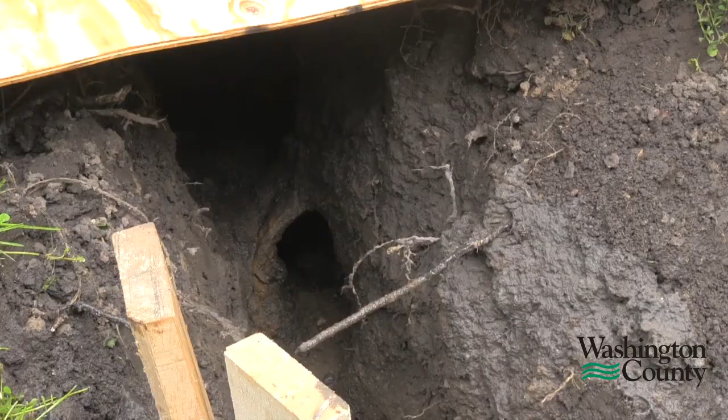This is what most people think of when they think of a failed septic system, where you have septic tank effluent coming to the surface like we have here. Although this is an issue that needs to be addressed, this is not the most common septic system failure.

Now, as nice as it is sitting here, let's get out of here.

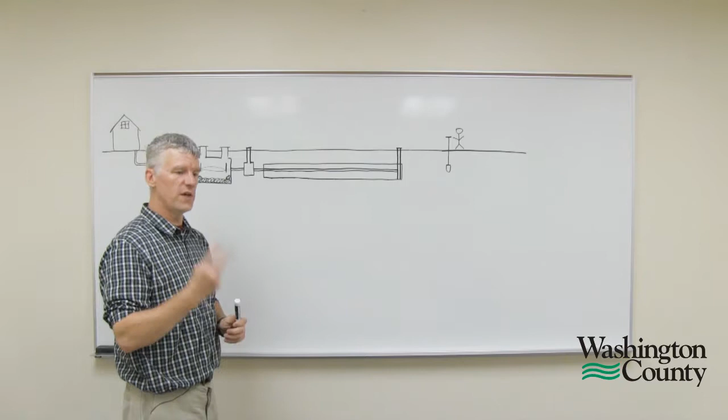That's better. So let's talk real quick about what an existing system compliance inspection consists of. There's two things that are mainly looked at for a compliance inspection. One is the integrity of the tank. On the sheet, it's called tank integrity. And what the inspector is looking for is whether or not the tank is watertight. And there's a number of different methods that can be used to assess whether or not the tank is watertight.

But one could imagine if there's a crack in the tank and the effluent that's in the septic tank is able to leach out, that is a system that is failing to protect groundwater. So that's one tank integrity issue. The other is just as common.

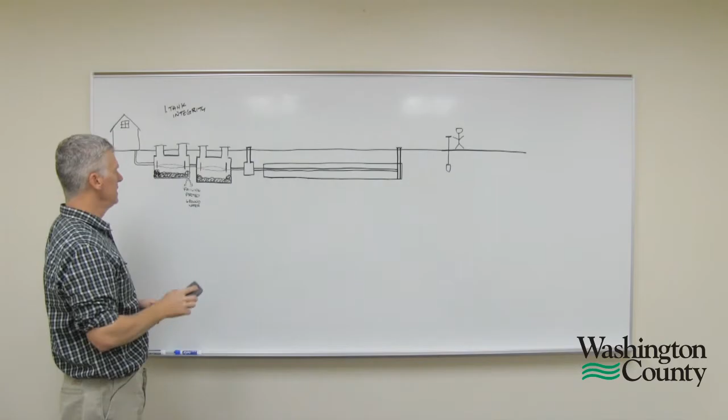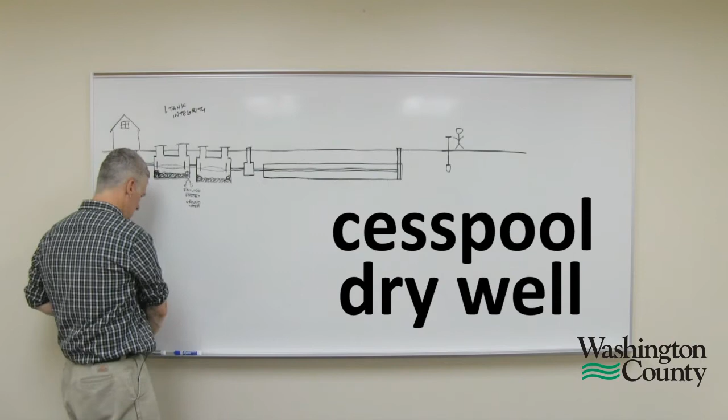Back in the 60s, or before septic regulations came in line, a lot of the tanks that were put in didn't have a bottom. And these are called cesspools or dry wells. And without a bottom, again, this effluent in the septic tank can just freely leach out and not get treated before it hits any kind of groundwater. So a cracked tank or a cesspool are both considered a tank integrity issue in a septic system that would require a replacement. So that's one item that's looked at.

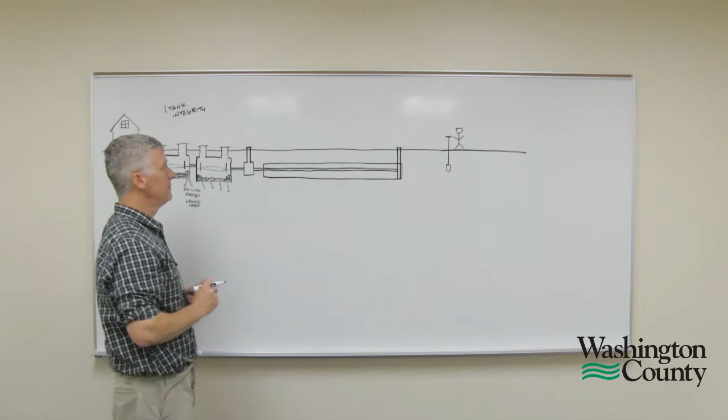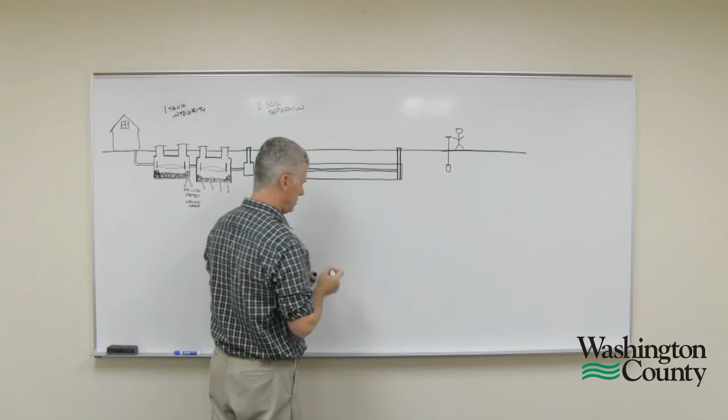The second item is what we call soil separation. What does that mean? That is simply a vertical distance between the system bottom and any type of restriction that is found during the compliance inspection. So let's imagine this system right here. Let's imagine that this distance is 24 inches. So the drain field trench was installed 24 inches into the soil. Now let's imagine that there's water at some point below the surface, which there usually is. So this is water table.

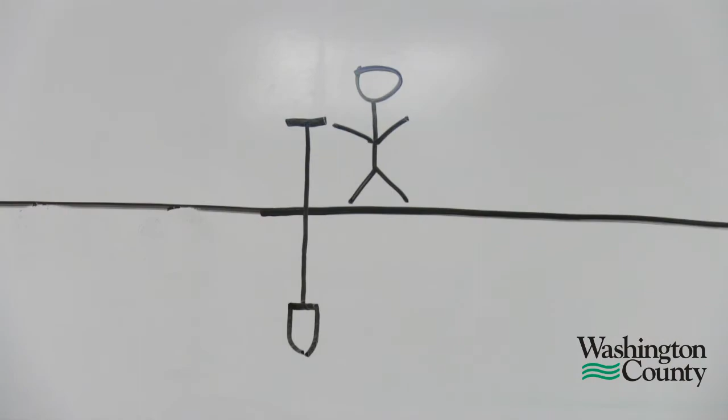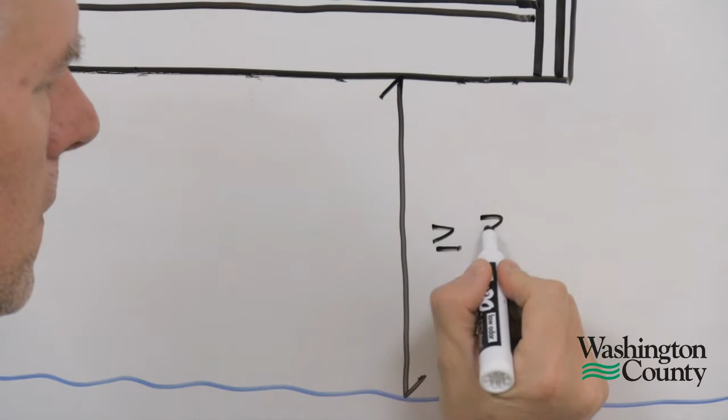Now, the first thing the inspector is going to do is determine what this depth is, either by tile probing or old permit records. He's going to determine the depth of that system, and then he or she is going to go some distance away from the drain field and take a soil boring to determine where the depth of that water table is. Now, this distance between the system bottom and the water table has to be greater than or equal to 36 inches. If that is the case, this drain field trench is deemed compliant.

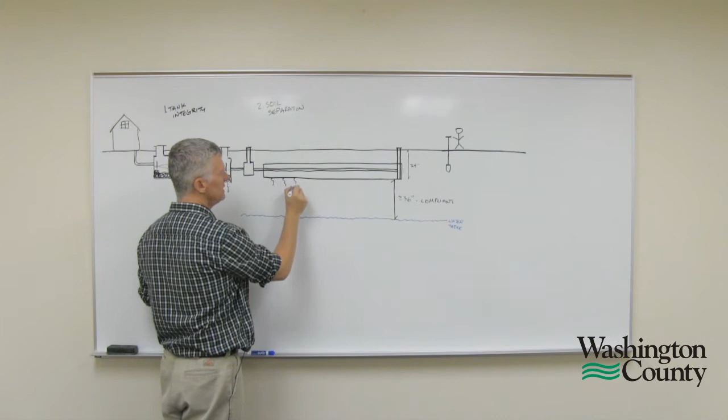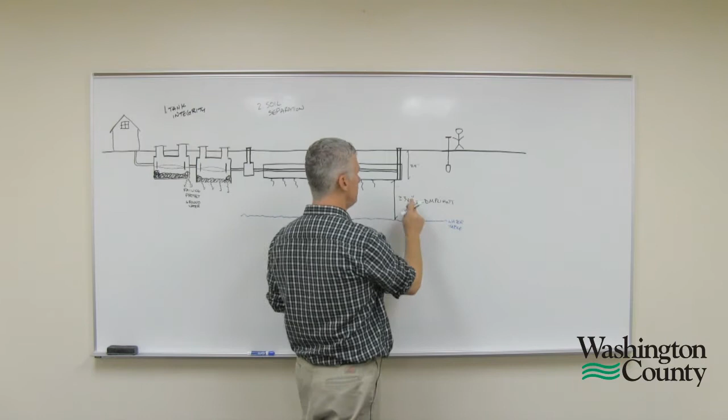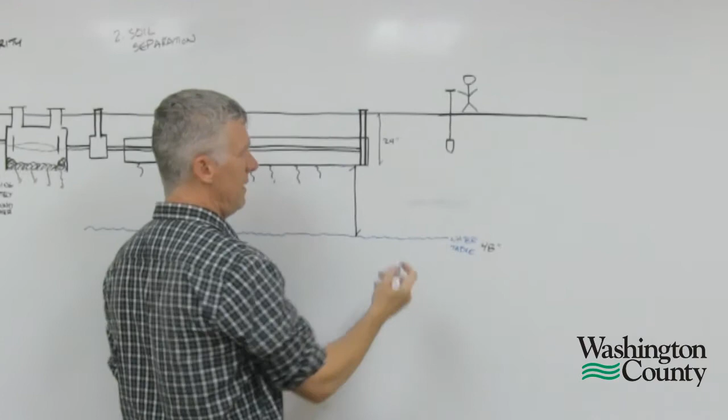Because in order for the sewage or the effluent that's leaving the septic tank to be treated in the trench, we need 36 inches of unsaturated soil for all the pathogens to be treated before it hits the groundwater. Now, if that compliance inspector determined that this depth, let's say, was 48 inches, now this distance is what? It's 24 inches. And that is a non-compliant system, because just like the leaky tank, it's failing to protect groundwater.

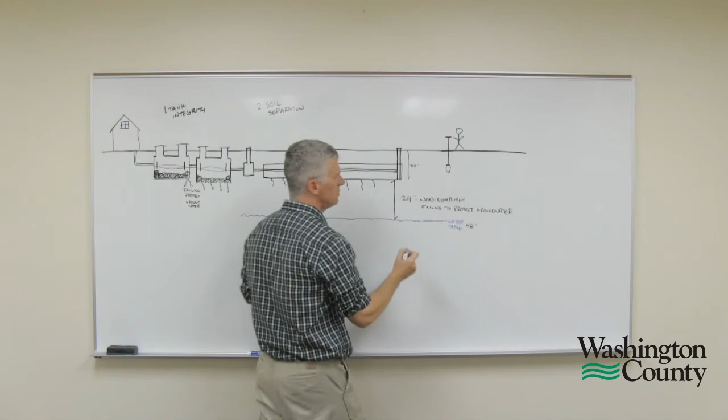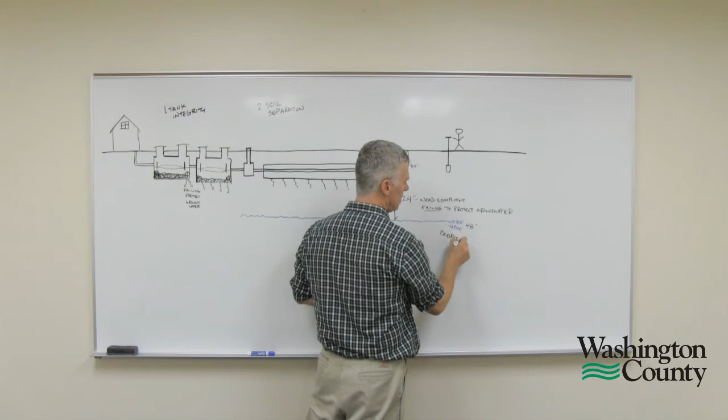A lot of times when people hear the word failing, they imagine what was in the video earlier with me standing in a puddle of septic tank effluent. That's usually not the case. That's an imminent threat to public health. Failing is failing to protect groundwater. Now, water table is one of the restrictions that we can find. Another one that's common in Washington County, especially in the south part of the county: there's a lot of bedrock very close to the surface, and that is also deemed a restriction. So we need to have that 36 inches of vertical separation between the system bottom and bedrock.

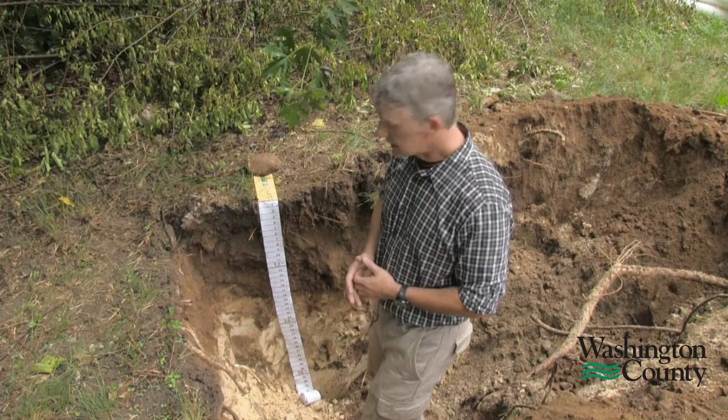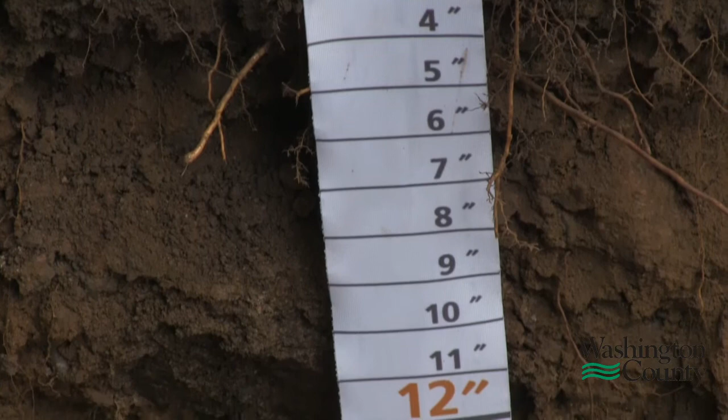Okay, here we have a real soil profile in Washington County, and we have this tape here to show you the depth of the soil and the restriction. And here we have a very obvious restriction of sandstone, which is bedrock, and we need to stay 36 inches away from that. So you can see with this tape here, if we were to put a system 12 inches into the ground, we would only have 6 inches of vertical separation between the system bottom and the restriction, and we wouldn't get adequate treatment before the sewage enters the bedrock.

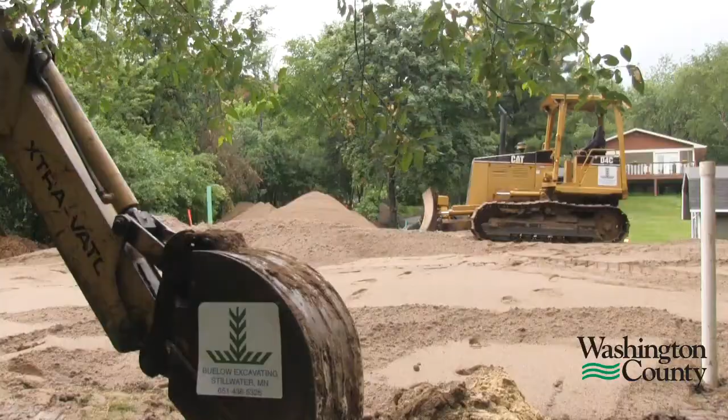So what we need to do in this situation is artificially provide the rest of the separation by putting sand on the ground. In this case, we're about 18 inches below grade to a restriction, so we put 18 inches of sand above the ground and then put a pressure bed on top of that, and that's where a mound comes in, which you can see behind us. That's what we're building at this site because of this restriction.